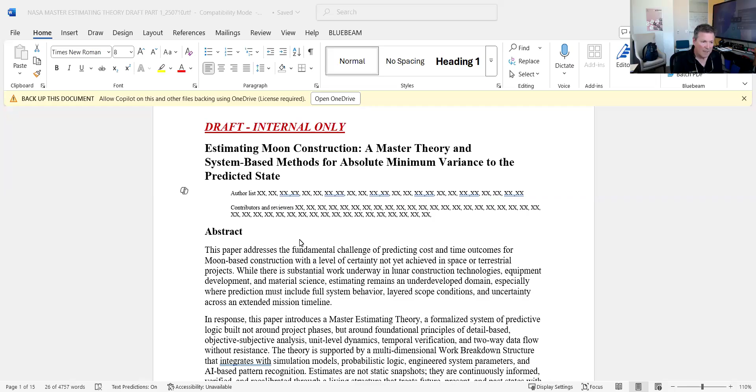Okay, so it starts with the abstract. So far, the abstract's getting good reviews. Again, I'm not going to go through it because it's so long - I'm just going to kind of walk through.

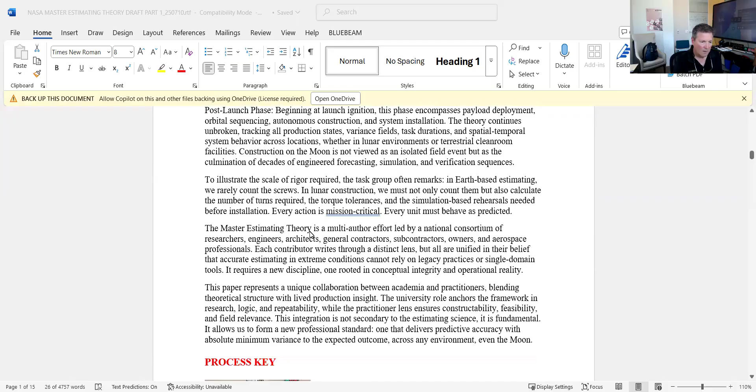Introduction. Because of the complexity of the process, this process is temporal - it's not a linear left-to-right flow process of data and projection and prediction and estimating flow. So what the team decided internally is we'll put a process map together.

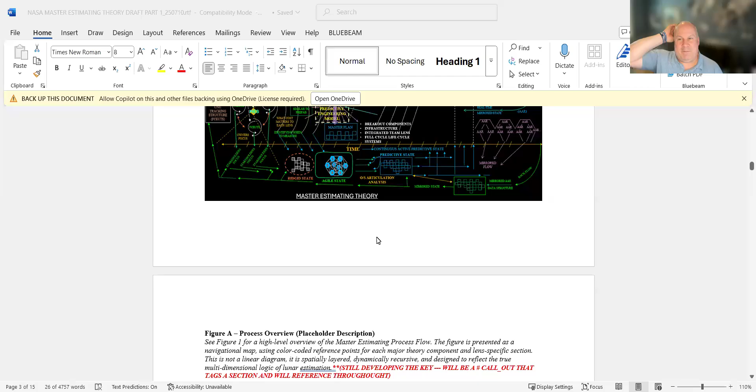I was joking around the other day, I called it the electric mixer process. You know, when you buy an electric mixer and you pull it out of the box, and you go, well, how do you turn the thing on? And you go to the schematic, and it will have where all of the pieces are. It has a schematic, a line with a number, like a switch diagram - electronic. I like mixer better, I was having nightmares of circuits and circuit diagrams. There you go, circuit diagram. Yeah, that was it - I was having old school flashbacks about those classes in college. Yes, well, that's circuitry, that's essentially what it will be.

But the reason that's important is because what it will do is ground everyone on the complexity of it. Remember, we think with this process as thinking left, right, up, down, in, out, time, predictions, verifications, repredictions, things of that nature. So we have to think holistically, and I think the paper does a fairly good job of getting us into that mindset.

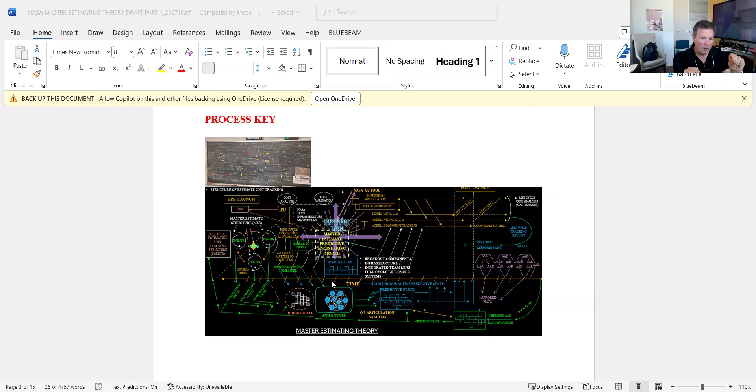So to keep everyone grounded, the readers - many folks are analytical thinkers but maybe not visual thinkers, and vice versa. So to keep grounding on both types of thinking as we go through the paper, I'll be referring to various numbers in the key, so the reader can, when we have a section that is somewhat complex, look at the key and see where in the process the flow is. So just FYI, all the writers or authors would pretty much do the same thing, so that's being done.

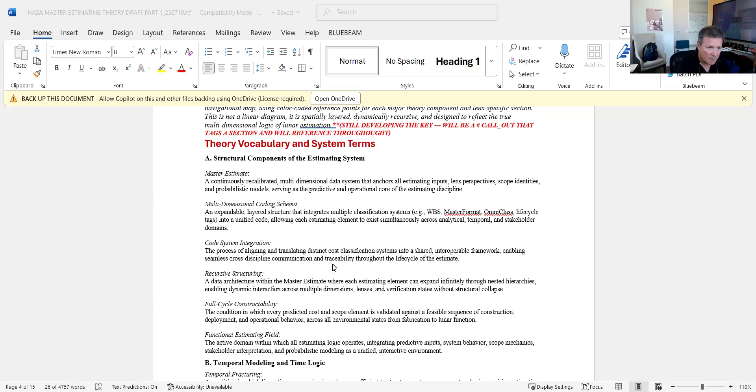The next thing is that we're starting with vocabulary. There was discussion whether we put the vocabulary at the bottom as an appendix or in the front - we decided to go in the front. The reason is because we're thinking out of the box, there's a lot of new terms and things, and we feel that if it's at the end, folks won't read the terminology. So just getting things aligned as far as what we're calling things. It's also categorized in different quadrants, as you can see here - structural components of estimating system and what have you - so you have kind of a meaning of what it's going.

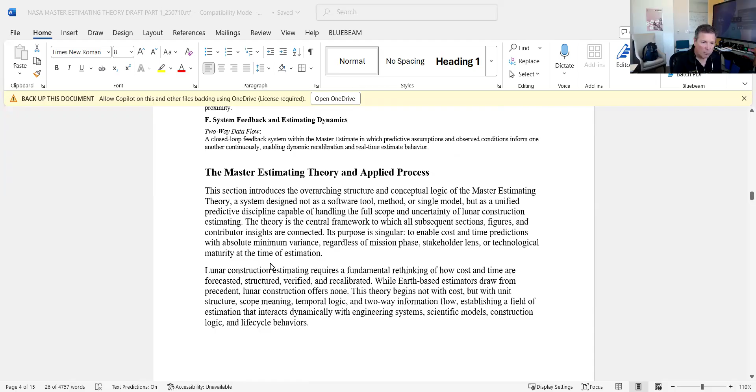Then we go into the actual master estimating theory, how it applies to the process, and that's broken down into various sections. Again, we'll release this here for review - we'll talk about that down the road.

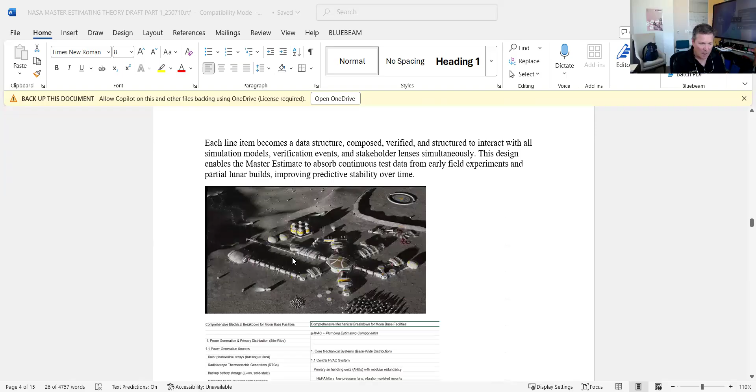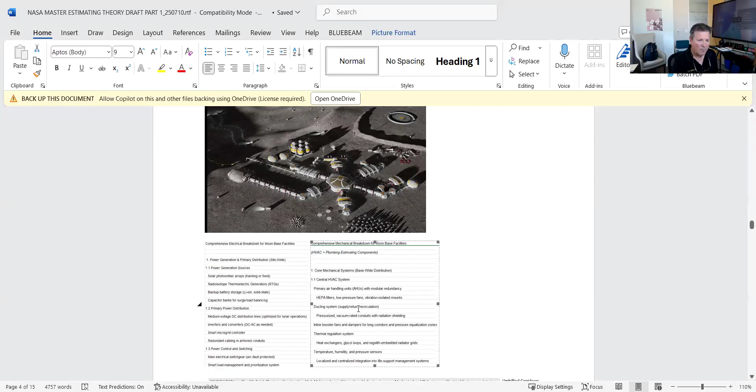So we are still developing the visuals. This is, if you recall, one of the meetings we did a breakout of what a moon - this is the hypothetical scenario that Johns Hopkins Applied Physics Lab put together. Jabu Abraham, if you recall, did a nice presentation - using that, we put kind of a downstream estimate together, and we'll use that as an illustration. We also have some linear examples of various things, so we're not always thinking in three-dimensional, but we have a practical thing too. Again, these are still being developed, but we're getting real close.

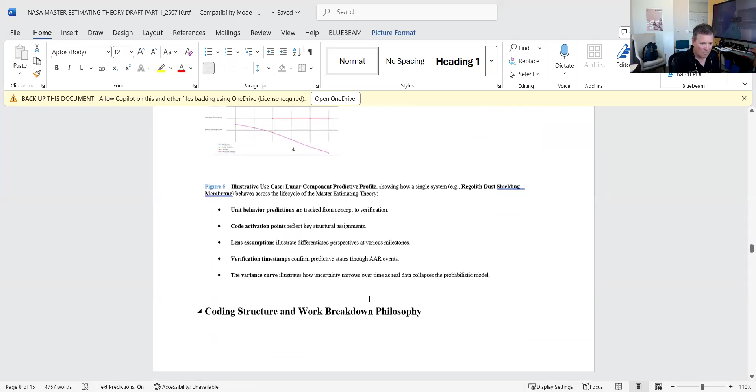Then we go into coding structure. I want to really emphasize something on this one - the coding structure is infinite, and I think the piece does a good job of explaining what the coding structure would be. We're building on the NASA 7 category coding structure, so we start with that, so it doesn't mess up anything that NASA has, because it's built on decades and decades of need.

It talks about all the other types of coding. For construction alone, we use CSI MasterFormat or UniFormat, but we're also introducing OmniClass, which is the modeling, and it's more holistic and has more temporal things. We're also using lifecycle and maintenance codes that will be developed, and each of these are separate systems.

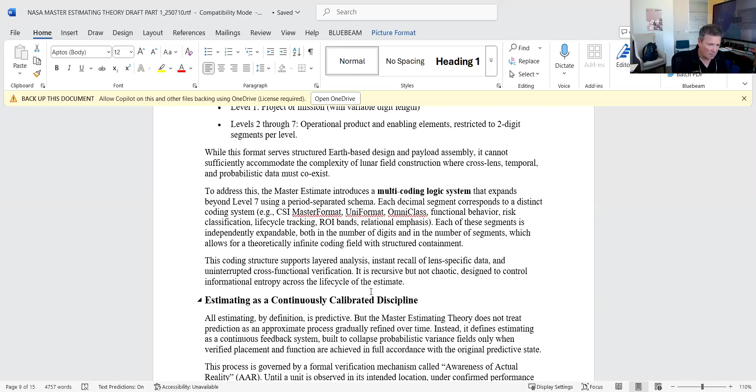Again, I don't want to get too far into it, but I think it does a good job of laying that out. I'll just kind of keep going.

We're making a premise that the verification and neural net receiving all the information is NASA's G2 process, which we've talked about many times, because it keeps all this in control of the owner, as opposed to that information just getting out of control. But it talks about how we'd be rolling into that, and again, that's theoretical at this point.

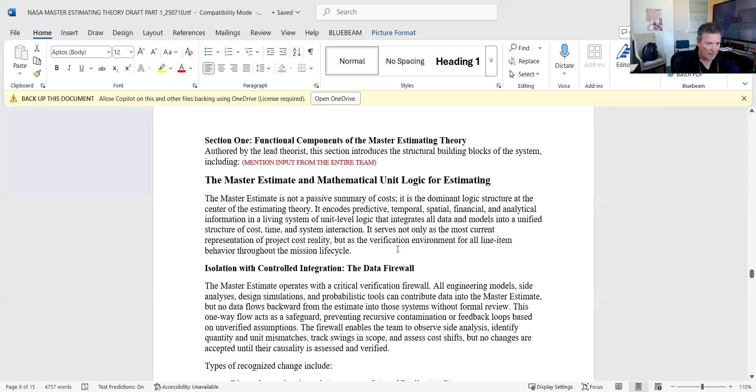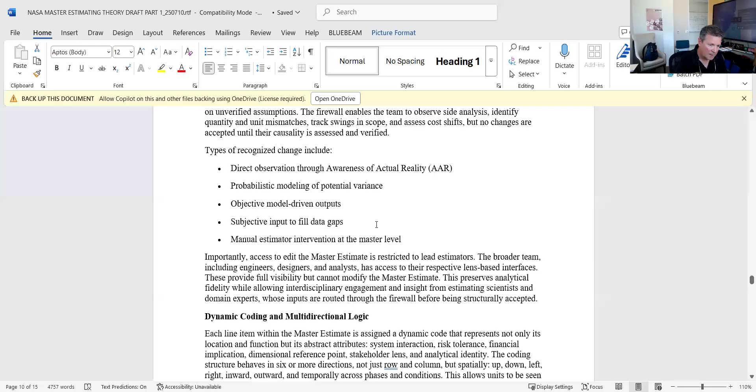Estimating mathematics, just beyond labor, material, equipment, things of that nature. We talk about predictive analytics and things of that nature.

Dominant twin. So in the construction industry right now, in engineering, I'm sure we're all beginning to hear about the term digital twin. And the estimate is in that category only—it's the dominant side of the twin. Usually when we talk about digital twins, we think about just modeling, and you have one model, a three-dimensional model, an engineering model, and then another twin that is more of an experimentation.

We're using that same concept, but what will happen is the master estimate becomes a digital twin of essentially everything. So the master estimate is literally in control of and knows every aspect of the project, or of the venture, I guess, or we can say project.

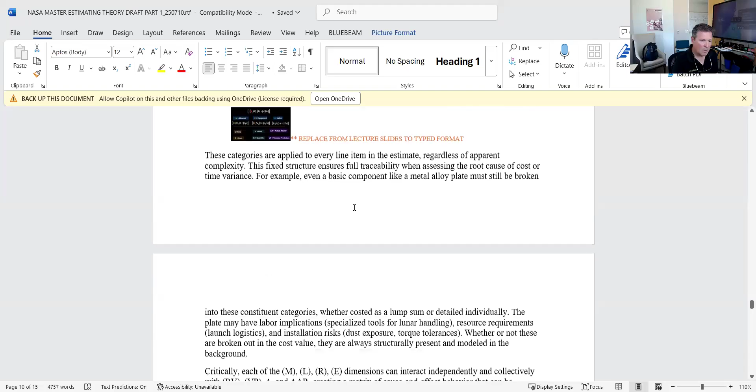Okay, I'll just kind of keep going here, because it's just a read that you have to get through. So far the feedback I'm getting is that surprisingly it's quite an easy read. Even though it's pretty deep, it reads well and tends to be a fun read, which is interesting—I thought it would be too complex.

And then we have 15 other authors that are writing small sections, so we're going to discuss how we're going to handle that. Look, this is a major complex challenge that we're trying to face. It is extremely challenging, and there's a lot at stake.

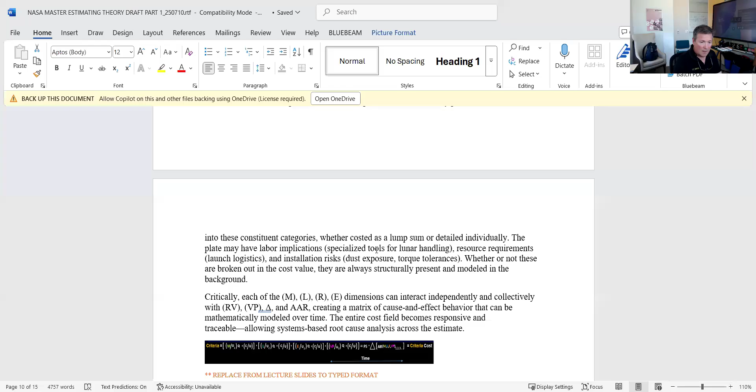So this should not be a small paper that doesn't lay out a very specific case from all angles and all lenses. It needs to be a compelling case, and that's what we've been working on for about a year and a half. Okay, I'll just keep going down here a little bit, and then I want to get to the next section.

Okay, so here is still what needs to be done. Obviously the reviews are nothing major right now, but there are some changes that need to occur, and I think this would be distributed to authors like on Monday, so you can read through it and help shape your portion of the paper.

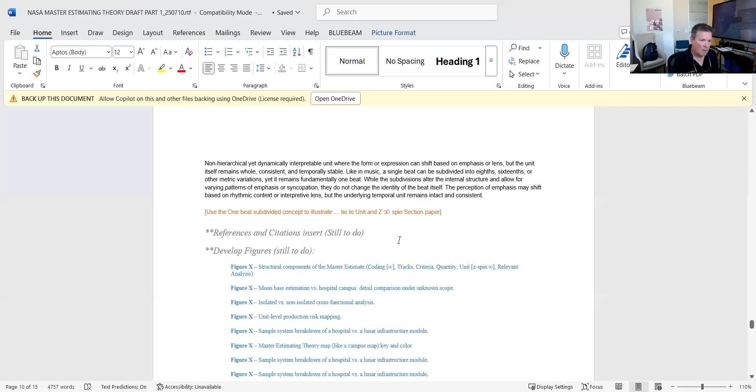Still to do—this is going to be more of a research paper and study paper. It's like a hybrid between a research paper and a practical application, because remember, we are practitioners pushing into academia. We're practitioners solving a problem, as opposed to academia being theoretical and then seeing if it fits in the practical application.

So it's something important to note. But through conversation, we still think it's extremely important to reference and indicate citations, because this is built on many foundations. It's a new way of thinking, obviously, but it's based on a tremendous amount of accepted and fundamental foundation. So far we've identified 20 to 25 crediting citations that will be included.

We're also developing figures, and because this is fairly complex, we want to make sure the visual aspect of what's going on is maintained, because there's a lot of abstract flow—how does one think of data and analysis in three dimensions? It's difficult sometimes, and some think linearly, and some don't. As an example...

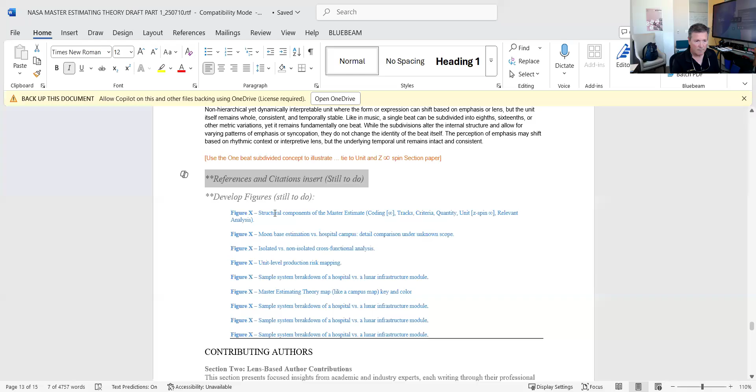All right, so what's next? So we have contributing authors. Now, section 2. Hey Paul, yes, I have a question, just going back to that.

There's going to be, I'm sure, multiple groups that become the audience of this paper. But who is the primary audience, and what are we trying to achieve with them at the end of the day with this? Yeah, I think the audience is not going to be just one primary group.

I want to back up and inform the group of something. For the last year and a half I've been to I don't even know how many conferences - that's how I met Patrick. He does a lot of conferences and is a very respected speaker in the industry. We met at a conference - remember that, Patrick? You were chairing the conference, matter of fact, and you were in the audience when I was presenting.

The conferences I do are analytical, estimating, pre-construction type stuff - AI in pre-construction analysis. Hundreds of folks have heard these concepts that this group has been working on for a year or so, and the excitement has been... we have 70 folks in this group right now. It started with 20, and it just keeps growing.

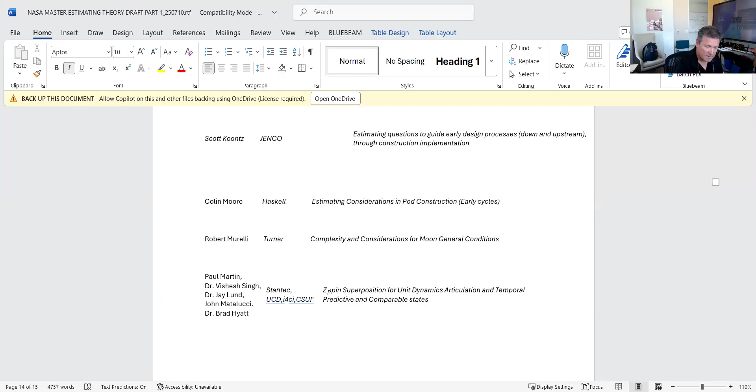Robert Murelli with Turner Construction, an international construction company. His expertise is on general conditions, and the general contractors in this group understand the complexity and challenges of estimating general conditions for any construction project. We're always thinking of complex projects. A lot of us have hospital experience here, but we're also taking lessons learned from fusion reactors and similar projects, looking at what went wrong and why.

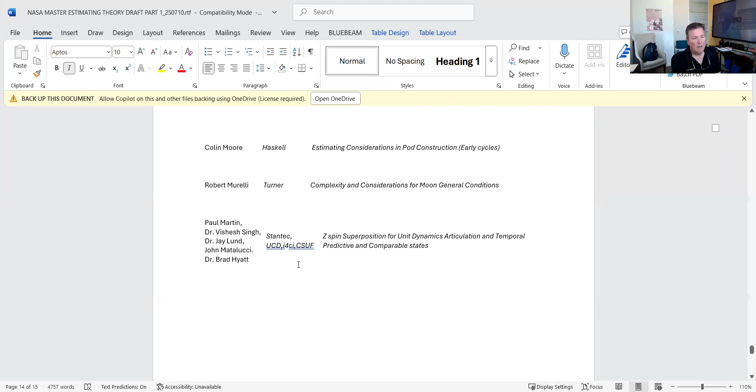Next, broken down into group authors: Dr. Vishesh Singh, Dr. Jay Lund, John Matalucci with Stantec, a worldwide architect and engineering firm, and Dr. Brad Hyatt.

That group will be writing on a piece called Z-spin superposition for unit dynamics, articulation, and temporal predictive and comparable states. That's a lot, I could barely get it out of my mouth. But essentially, that is looking at unit costs in an infinite amount of ways and comparing different unit costs within an estimate.

So every lens and every expertise can look at the master estimate in all sorts of ways. And that's relevant because there's a lot of prediction and analysis that has to be created or understood. Anyway, that's going to be an exciting paper.

Next, Jay Lund, Dr. John Bolander joins the team, Dr. Gray Nearing who's with Google as one of their head research scientists, and also Dr. Young H. Kim with the University of Louisiana. That group will be writing an AI audit control judgment gate for complex sequence estimating analysis.